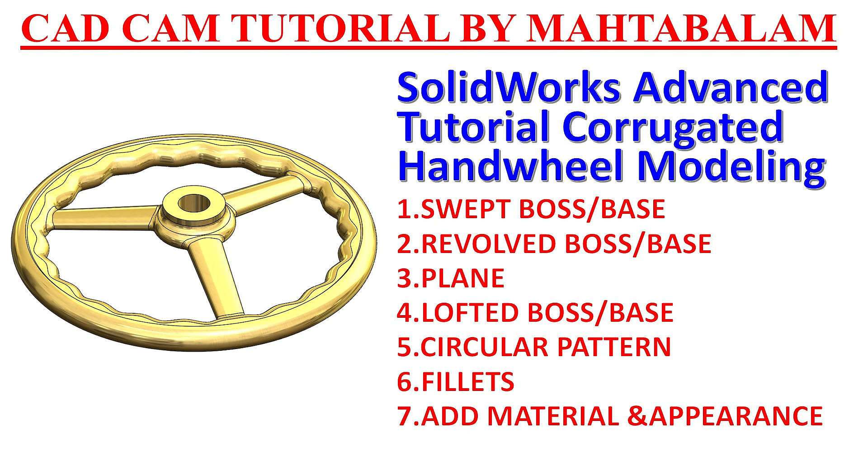Let's take a new exercise in SolidWorks: corrugated hand wheel. This is a kind of metal wheel, a car wheel, and you will see all dimensions are in millimeter. It is casted, and material is cast alloy steel. Let's start. First we will create the outer body, then the center one.

Now you will see the outer body from outside. It is circular, but from inside it is zigzag curvy. See, this structure we are going to create with the help of spline. These radii given are 22, but we are going to use spline to find this out.

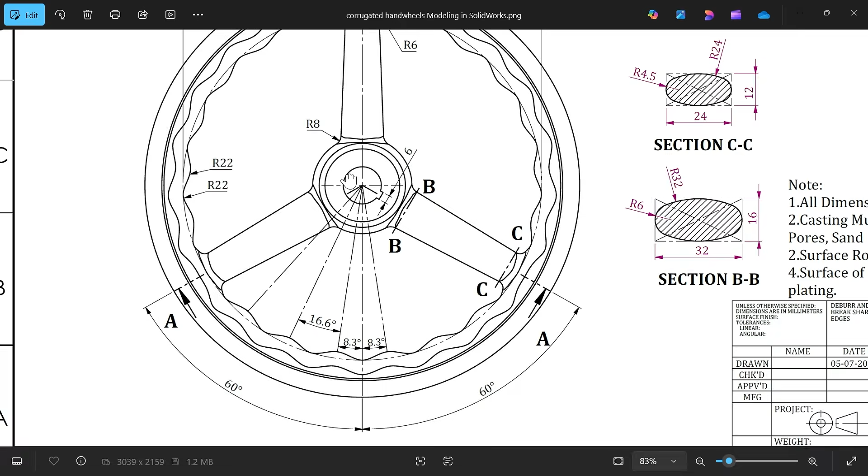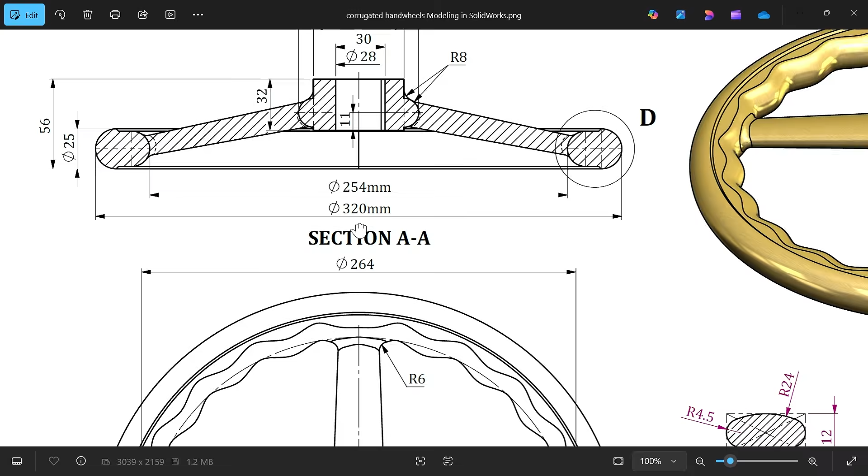Let's find out how we can do this. This outer diameter is 320. Then you will see there is a detail, section AA, from here to here. This is section AA. This section has, from inside to inside, 254, and you will see crest and depth. This depth diameter here is 264.

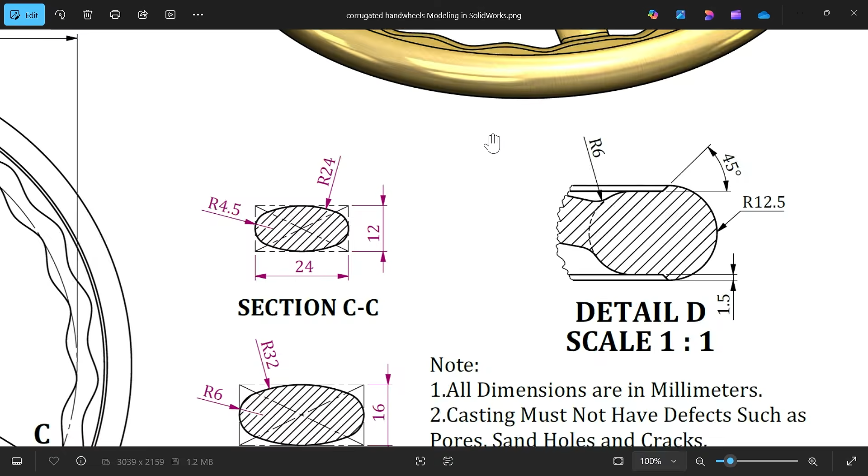So this is the diameter for this curve. Then the shape you will see is 12.5, 45, 1.5. You will see here the radius we will apply at the end. How will we fix this one? We have to fix this structure between this outer line and this inner line and outer line. The angle between these two is 8.3, total 16.6. There are 4 crests, so let's see how we can do this. Angle 60 degrees.

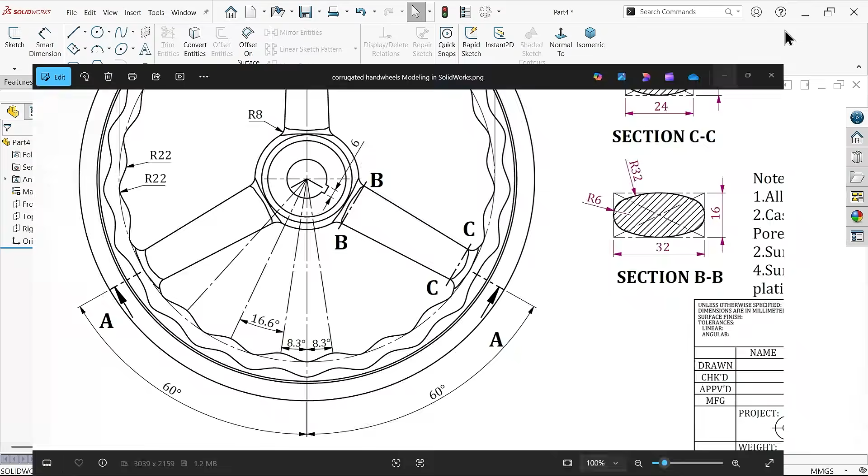Top plane sketch, activate circle, and let me draw 2 circles. Make sure for construction. Now activate smart dimension: 264 millimeter outside, 254 millimeter inside.

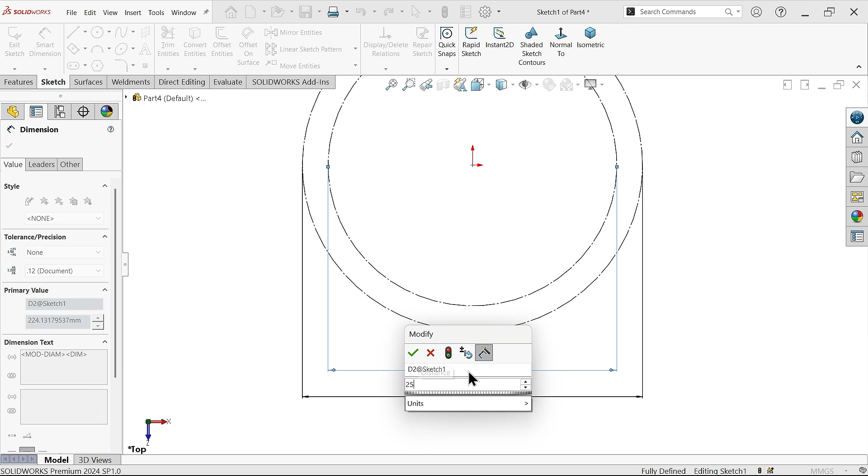Activate line and start from outer circle to here and come back. Again activate the same line as center line. Let me draw. Smart dimension: 60. Now the angle between these two.

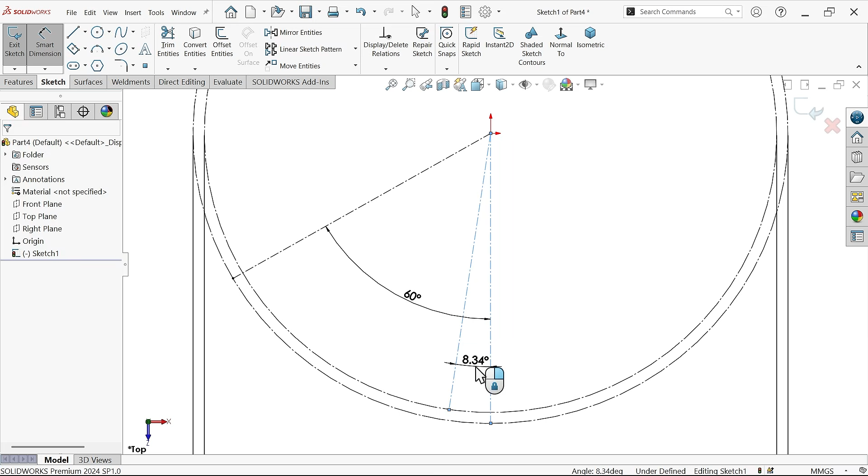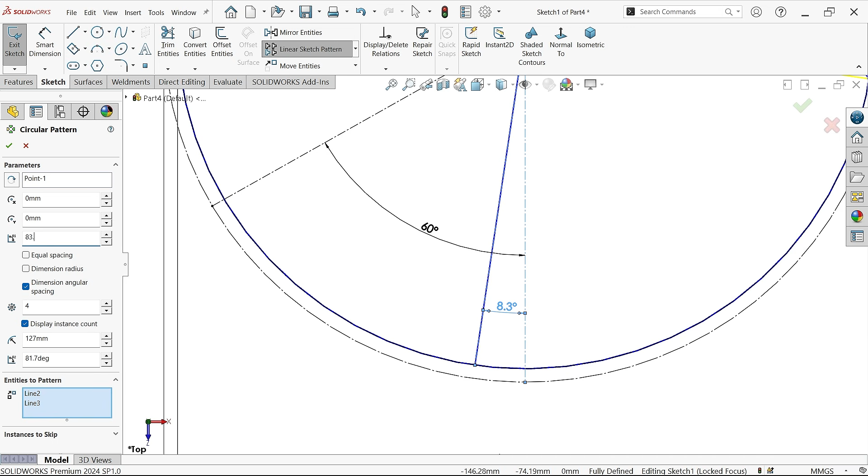8.3 degrees. Now let's try to use circular sketch pattern. Choose center here, and here choose dimension angular spacing. We need 4 number, and here let me select these 2 lines, and apply the angle 8.3, total 16.6. You will see 4 number of instances.

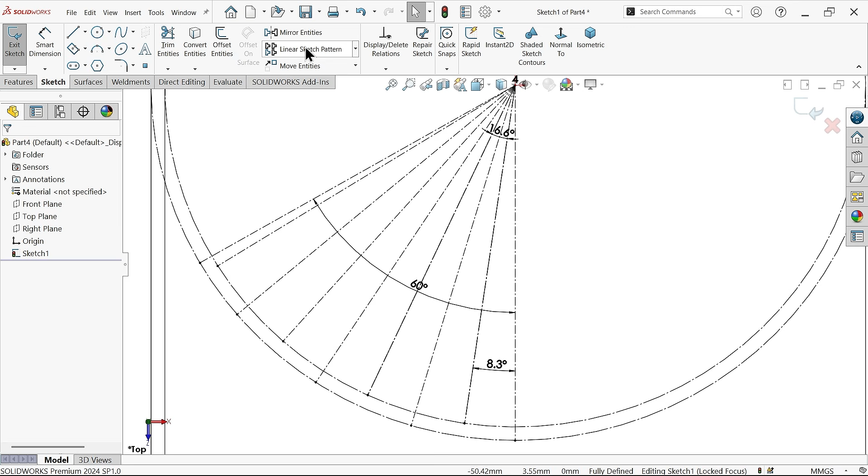Now similarly we have to mirror. This all we need to mirror, because we need these points. Mirror about this vertical line.

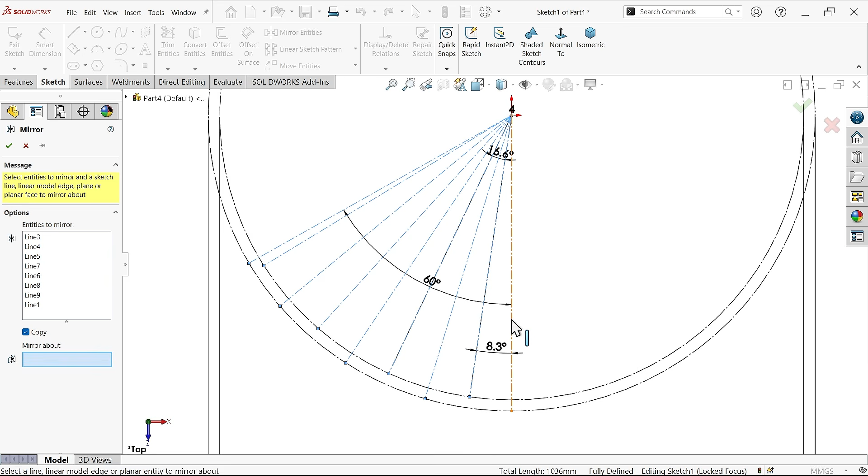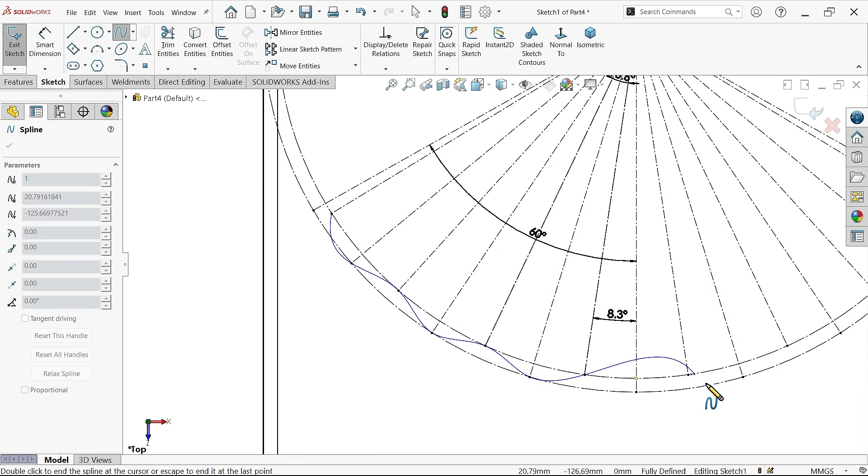Now let me select spline here. See, now spline going to start from this end. Connect. Now one by one connect all these points alternatively. It will take time, we will create only one side, later we will make the pattern.

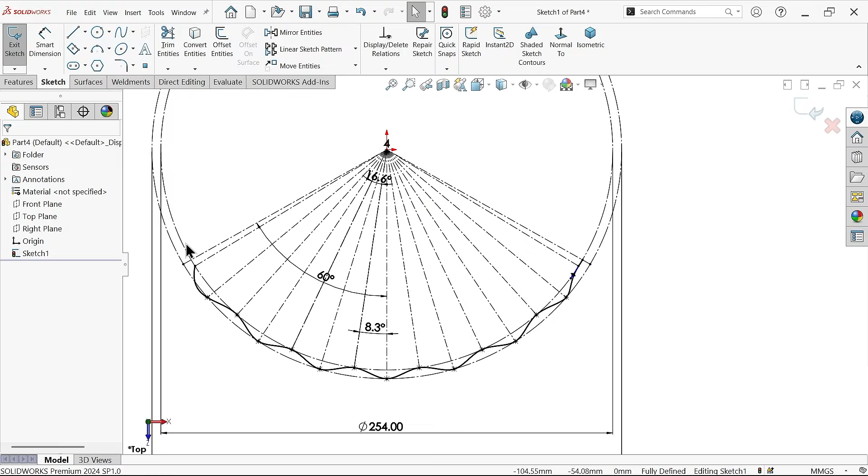Right click, select. Now here 3-point arc, connect. Now select this, select this angle and this one as tangent. This is important. Here let's do this 3-point arc, connect this small portion to here. Now see, this is fully defined. Select this spline, drag this handle, select this handle, hold shift key, select this arc, tangent relation.

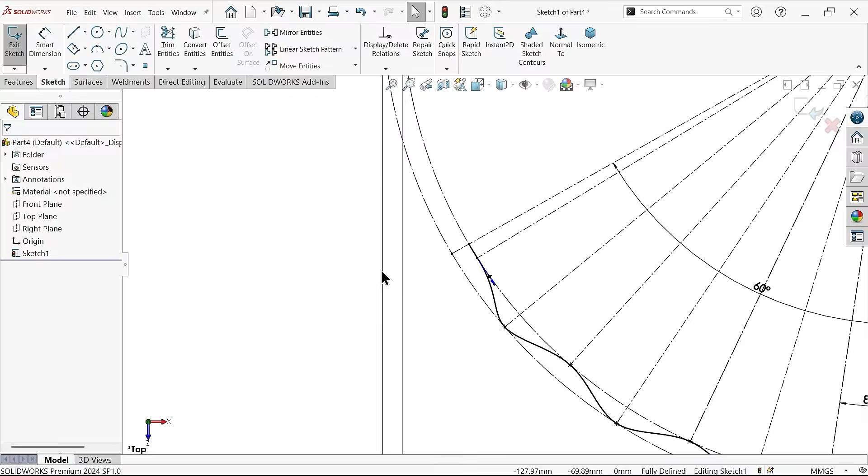Now we don't need to define this angle. If you measure this, the radius is going to be near 22. Circular pattern. Here I am going to select this center, 3 number... equal spacing 360 degrees.

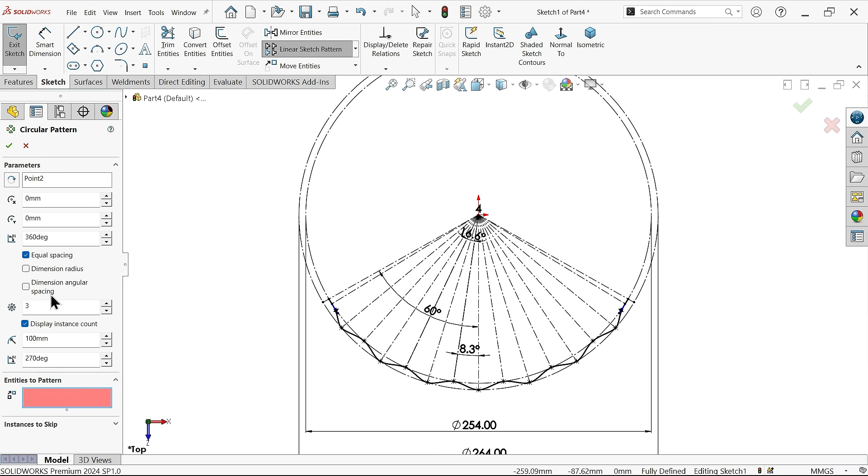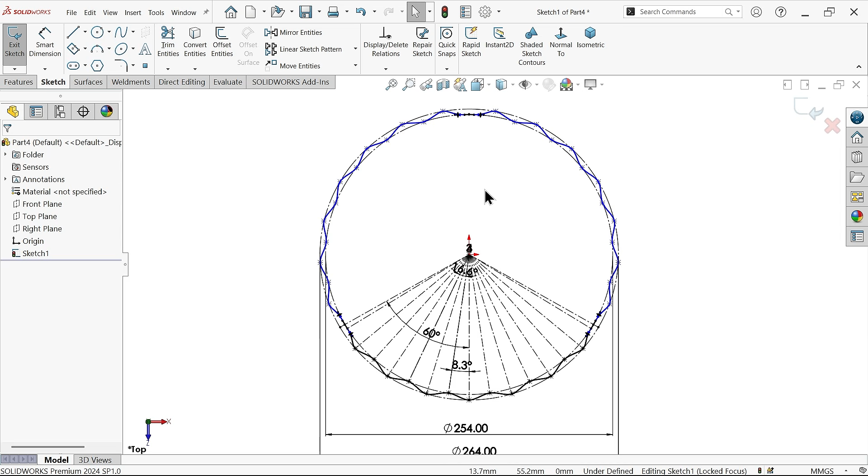Now here let me select this pattern, and even let me select this one also, so that we will get... okay. Now we are not going to use this one. This is perfect. Let me exit and create one more sketch.

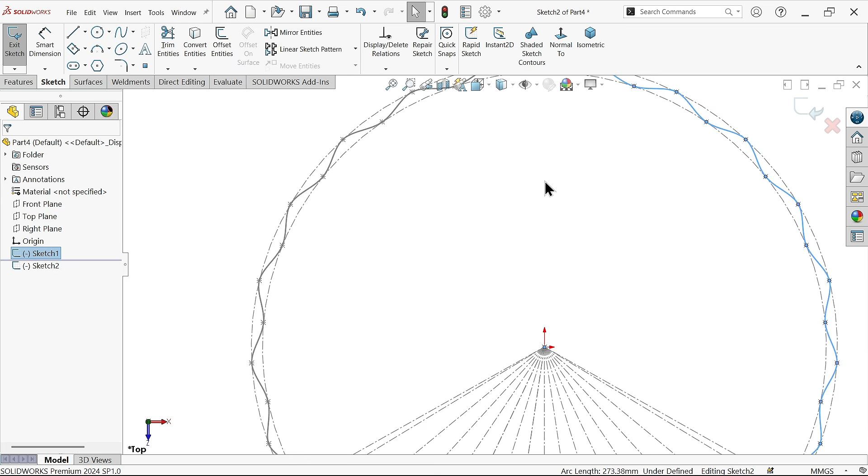So again I am going to choose top plane, sketch. Now here select chain. Convert entity. Again select this one and let me select convert entity. Hide.

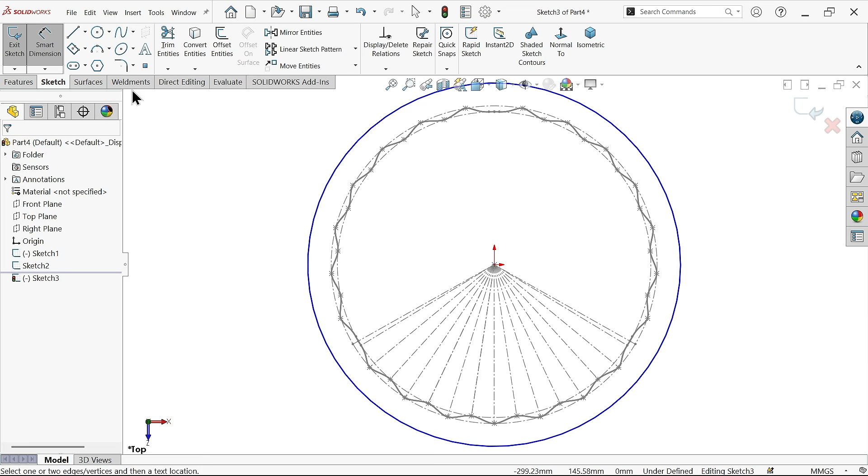Here connected only, here balance. So first sketch, show, select this, convert entity. Exit. Now this is the structure I am going to use. Again go to top plane, sketch, circle, draw a circle and make diameter 320 millimeter.

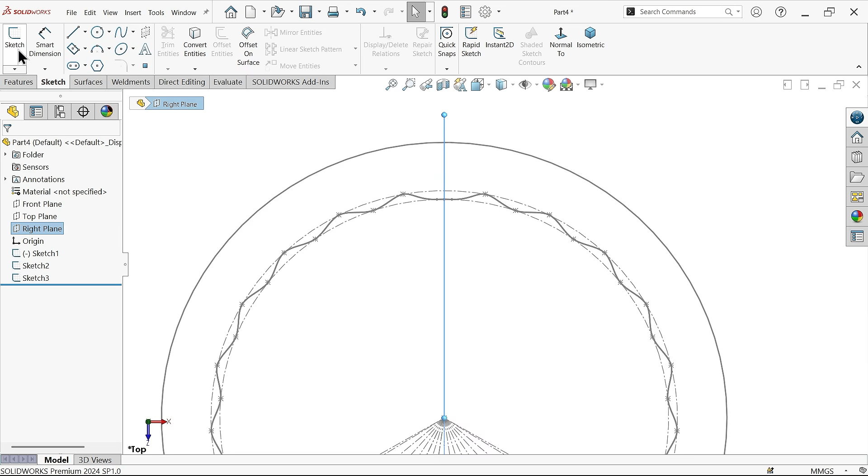Exit. Now we need to create those planes. So let me select, choose right plane, because right plane here is going to mesh, coincide properly. So sketch, ellipse. Let me choose slot, straight slot. Press escape key to get out.

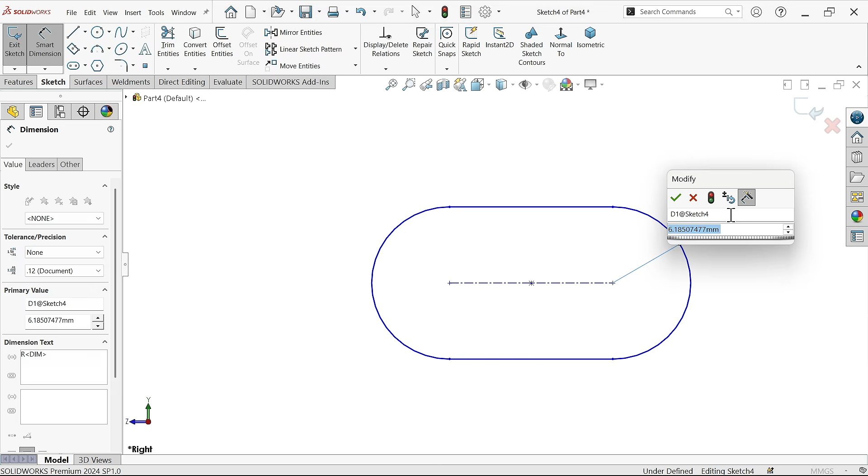Now here choose offset. Oh, before that, let's go to choose smart dimension, radius 12.5. Now again offset 1.5, reverse. Now delete this one.

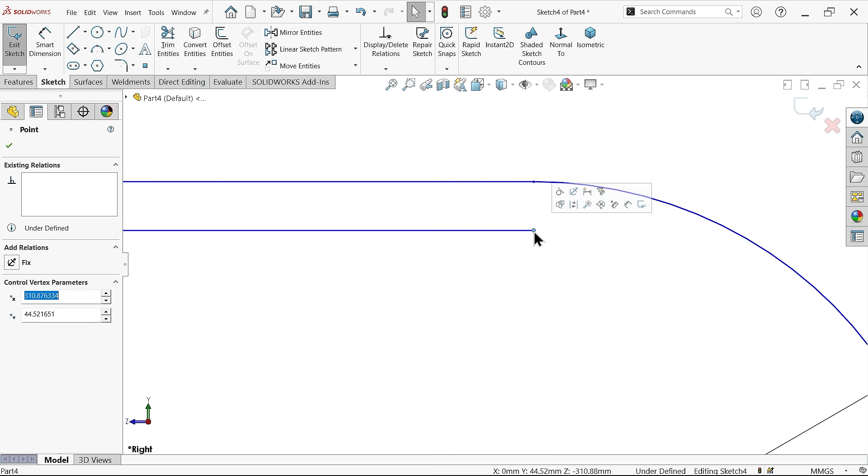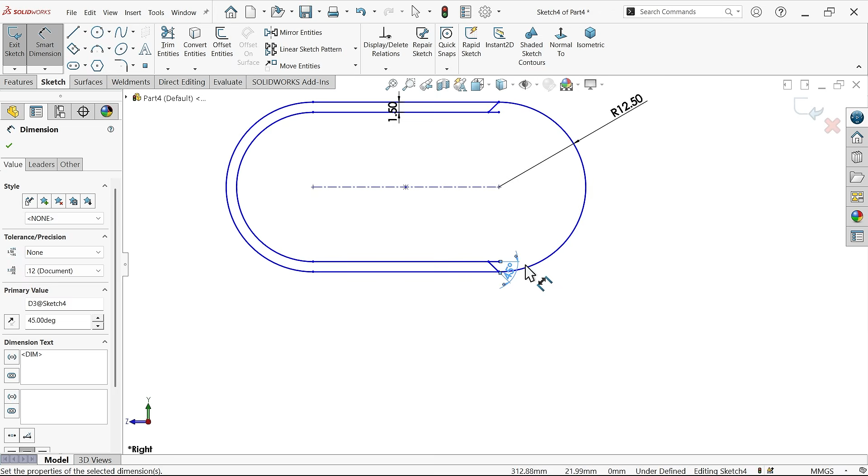Line. Now from here to here, similarly connect here also, from this point to here, smart dimension, 45 degrees. Trim entity, trim this one, trim this. We need this shape.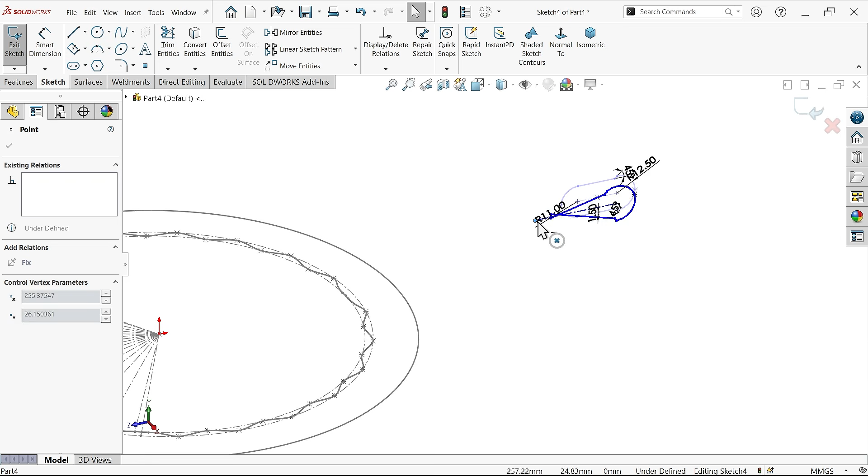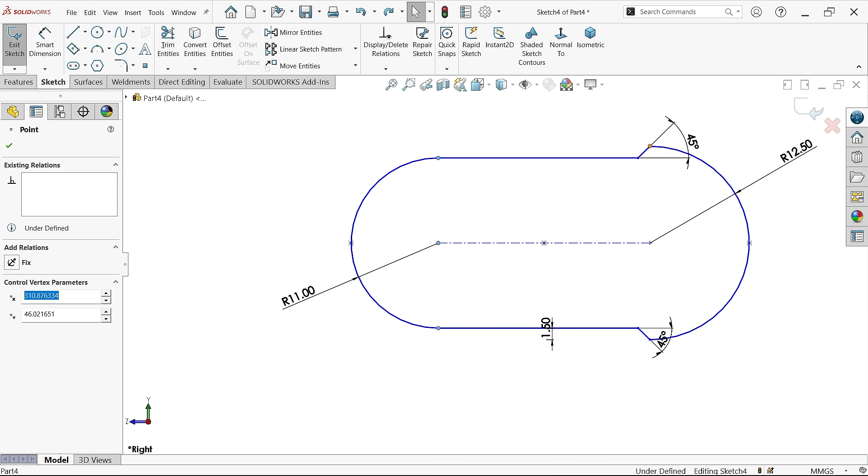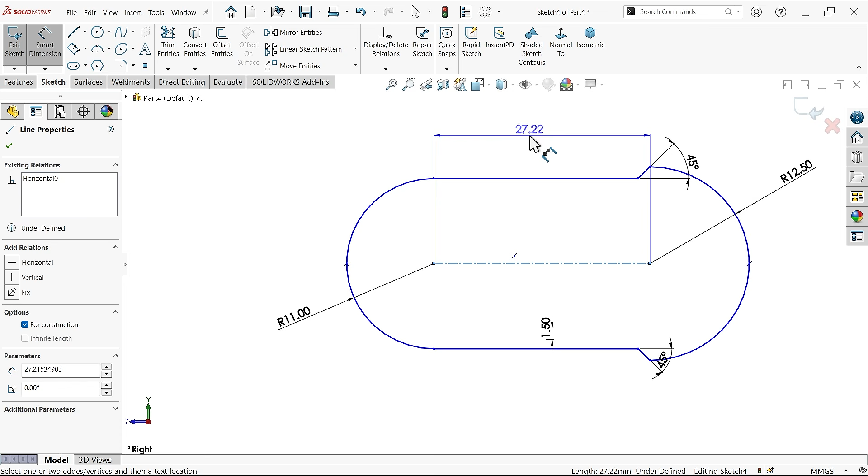Okay, again these. Let's create a few important relations. Undo, that's fine. Now select this point, this point, this point, vertical. This is important. Now here, this point, top point, hold shift key, this point, this point. This is important, vertical relation. Now let's try to move. For the time being, I am going to apply a dimension of 20. For movement, we have to delete this one. Now this is perfectly moving.

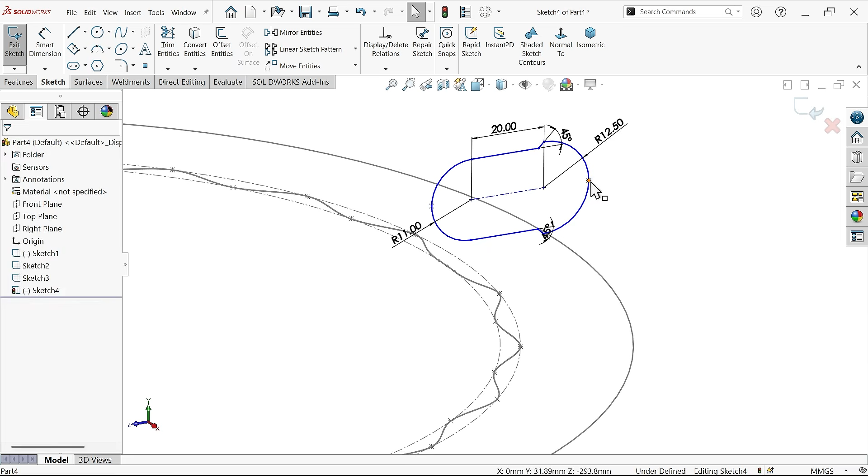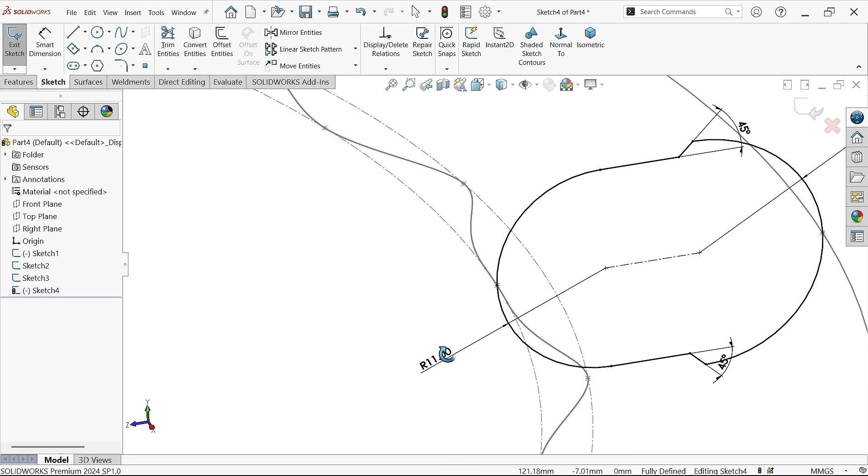Now select this point, hold shift key, select this outer curve, make pierce. Delete this. Now select this point, select this curve, pierce. See, this is an important relation, you must achieve this one.

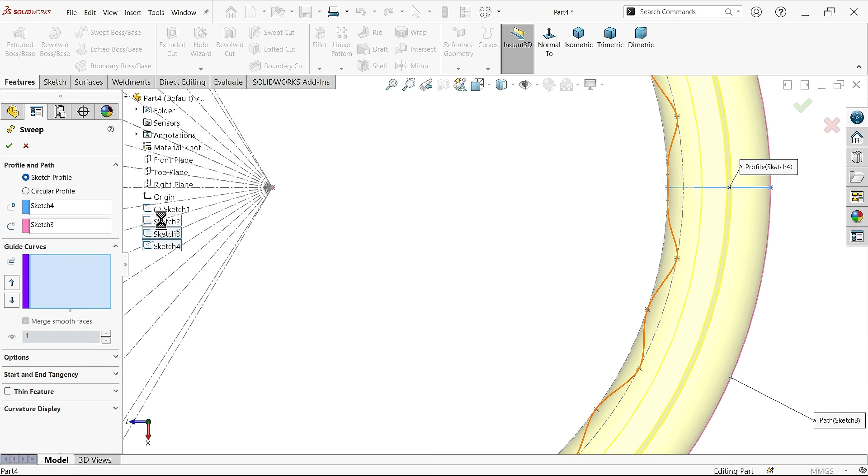Finish. Go to feature and use swept boss base. Here, see profile selected, sketch profile. Now path I am going to select outside. If you see from top, this is circular. Look, but go to guide curve and choose this curve, or drop down. See, it took the shape.

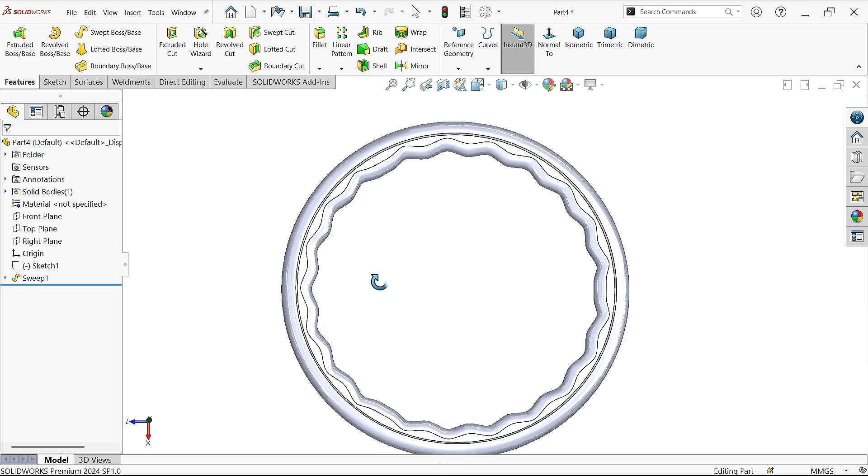Merge smooth faces. Okay. Now let's hide first sketch. Now you will see, see, we achieved. Section view, normal. Okay, now see, this is what we need to achieve.

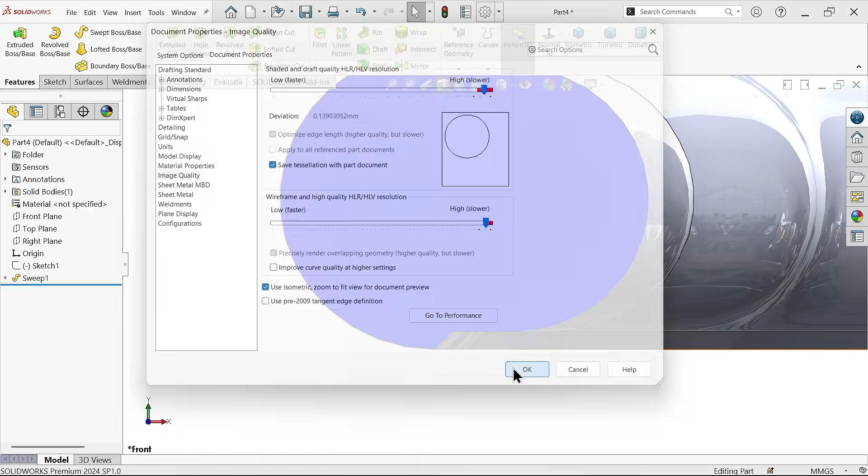I am going to keep quality higher. Okay, the edges become sharp.

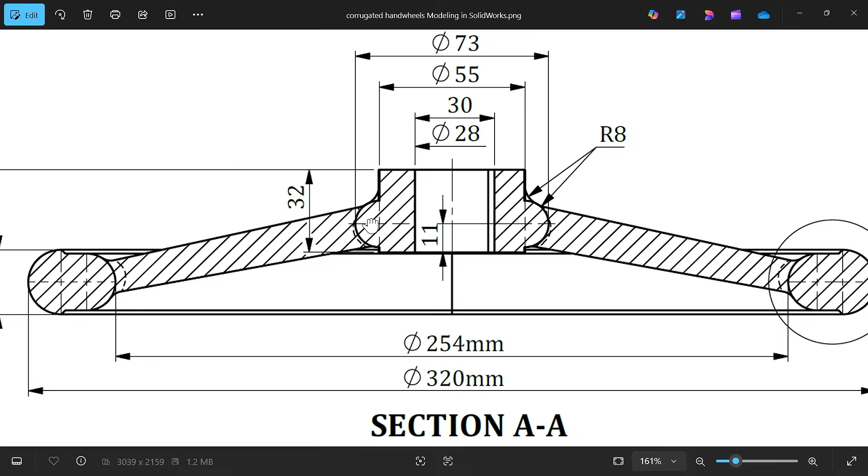Now let's make the center part, you will see in section view. See, this is a kind of shape, 32 total, 56 from bottom. Now there is one curve 11 millimeter and inside diameter 28. Then there is one more diameter 55 and this circle outside to outside 73 millimeter. 11, 30. Okay, that's finish.

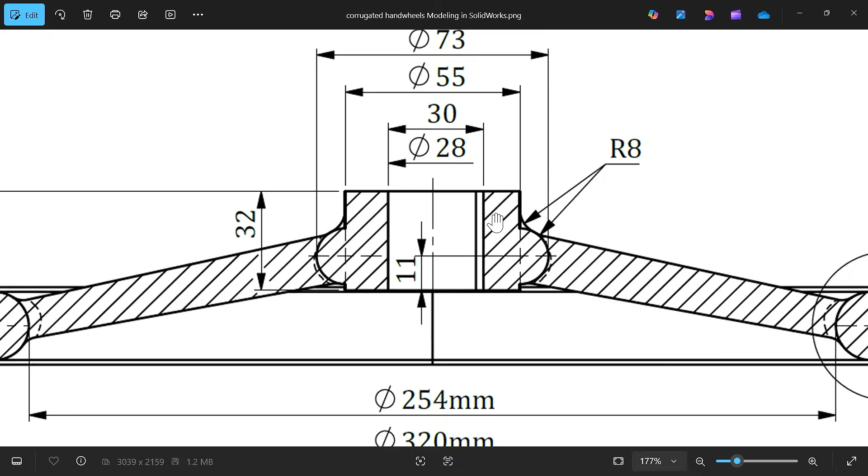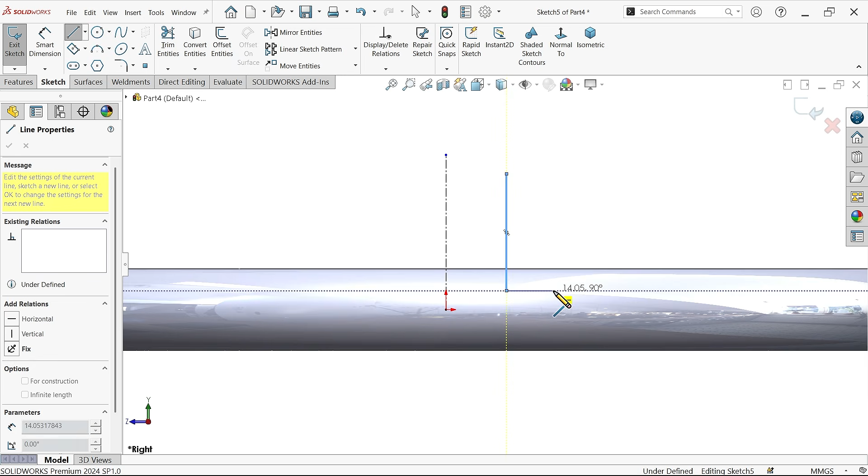Right plane sketch. Now let me select center line. Go back to the point and see the point is converted into arc. Press escape key to exit.

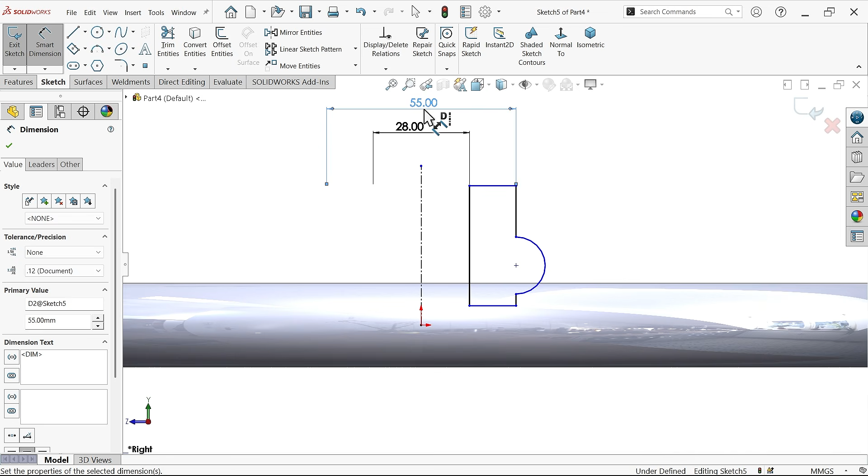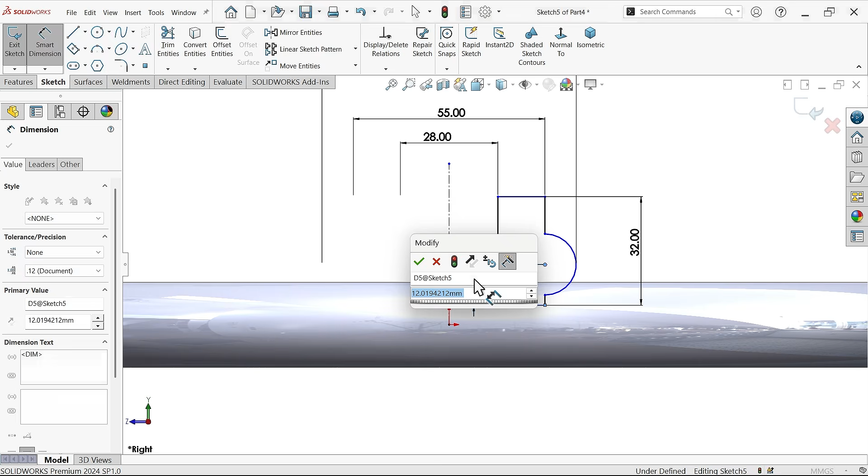Smart dimension. Inside diameter 28, 55. Hold shift key and select this one. Outside to outside 73. Okay, 32. From here to here 11. Okay, what else balance? Distance from here to bottom of this face, 56. See, it seems fully defined sketch.

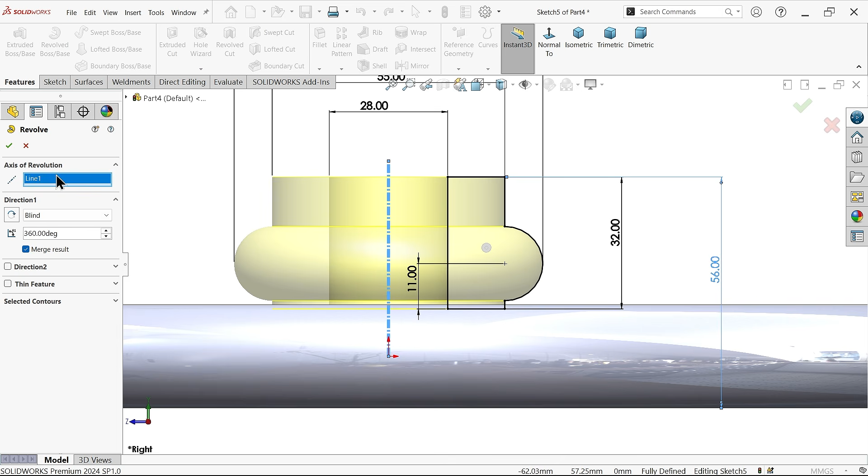Go to feature, I want to add a circular body in a circular way, so you have to apply revolve boss base. Now see, by default system took this line as its axis of revolution. Merge result, angle apply 360 degree. Okay, and here we have a complete 360 body.

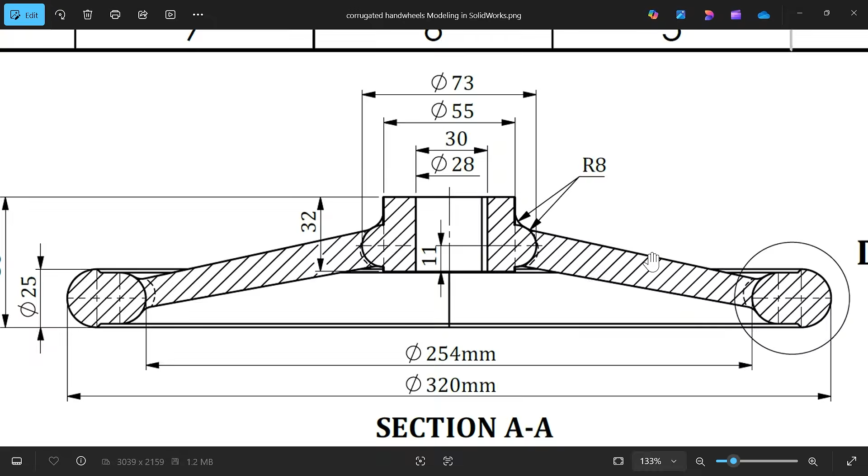Now let me select sketch, show, and select this sketch, show. Now let's make this handle, you will see this handle. This handle going to connect from this circle to this circle, and there is a different section C or B. B 32 16, this curve 32 6.

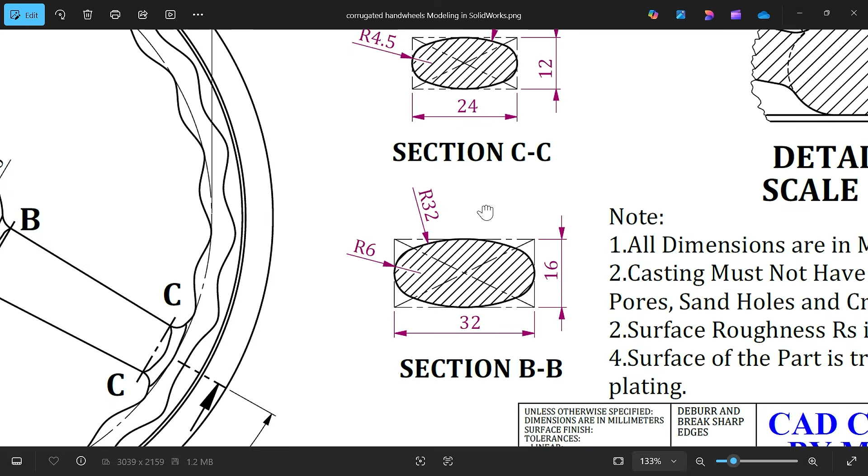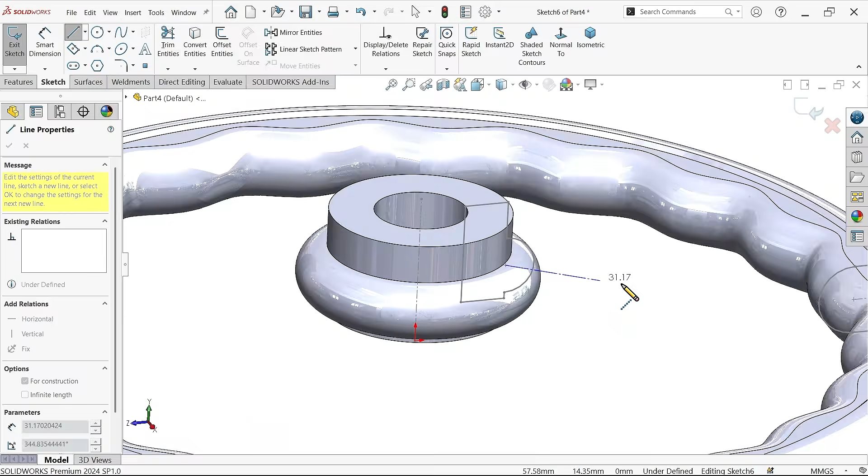24 12, 24 4.5. We have to create first plane, then we have to apply this. Let's see how we can do this. Right plane, sketch, activate center line, and see, select the center point to center point of this.

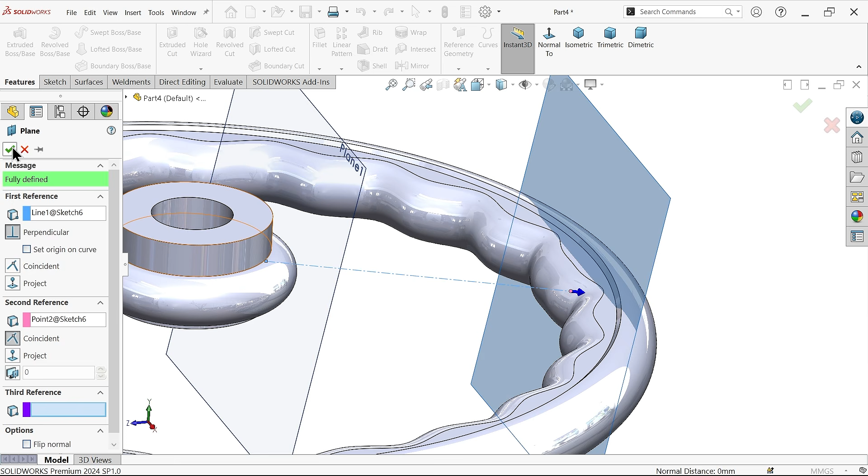See, this is fully defined sketch. Exit. Now let me hide this previous sketch. Plane. Select line, select this point. Now this plane perpendicular to this line. Say OK. Again I am going to choose plane. Now first reference this line, then second reference I am going to select this another end point. See, this plane perpendicular to this line.

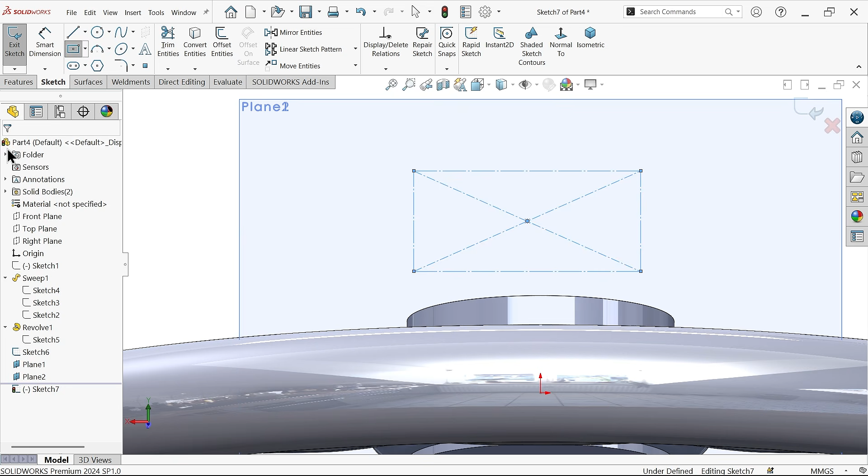Say OK. At both the planes we have to create those cross sections. First plane, sketch. OK. Center rectangle. Make this one for construction. OK. Now I am going to use 3-point arc.

Actually, before that first we have to apply the dimension to outside. Okay, anyway, let's see. 32, 16. Okay.

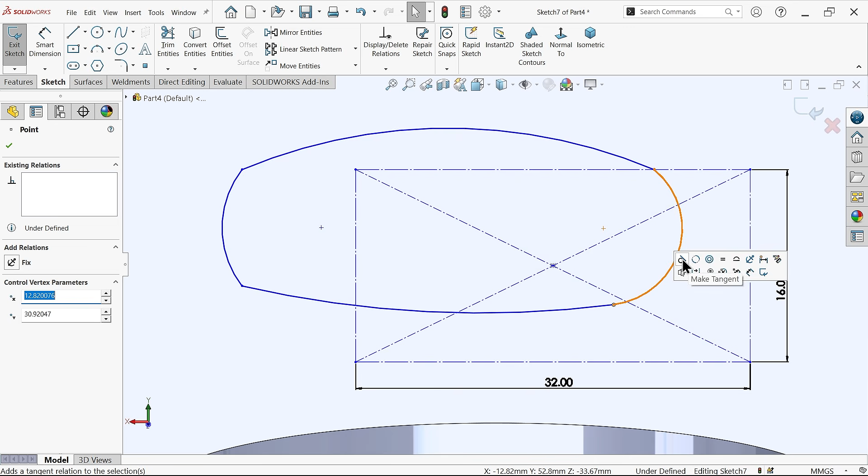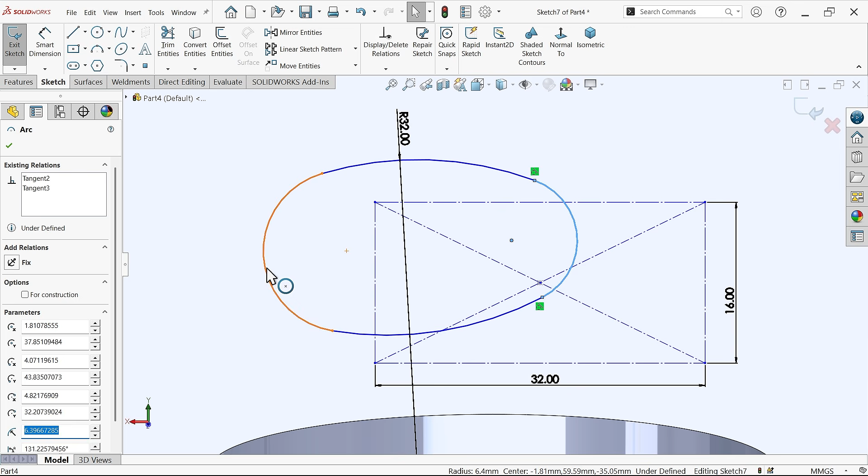Now select this point, tangent, tangent. Make all points tangent. Okay, one more relation. Select these two, equal. Now these two, equal.

Radius 6. Okay, now we have to fix. How we can fix this one? Select this one and this one, tangent. Similarly, all walls should go tangent with them. Okay, one more important relation, make it horizontal. Okay, we don't need this angle.

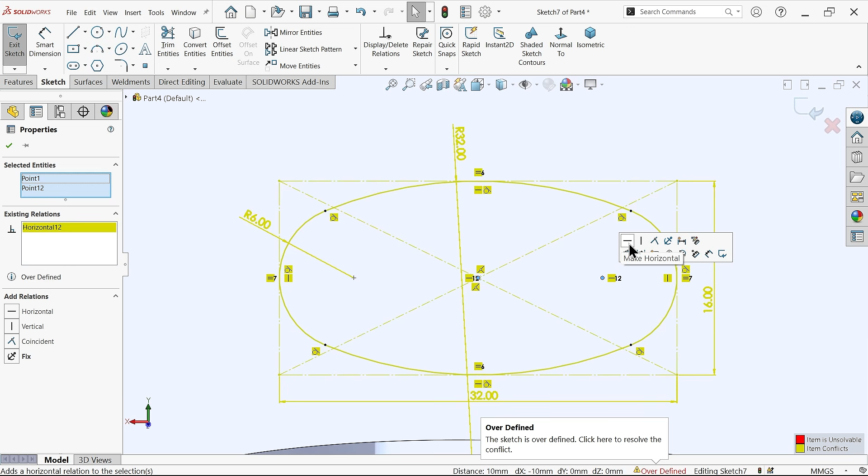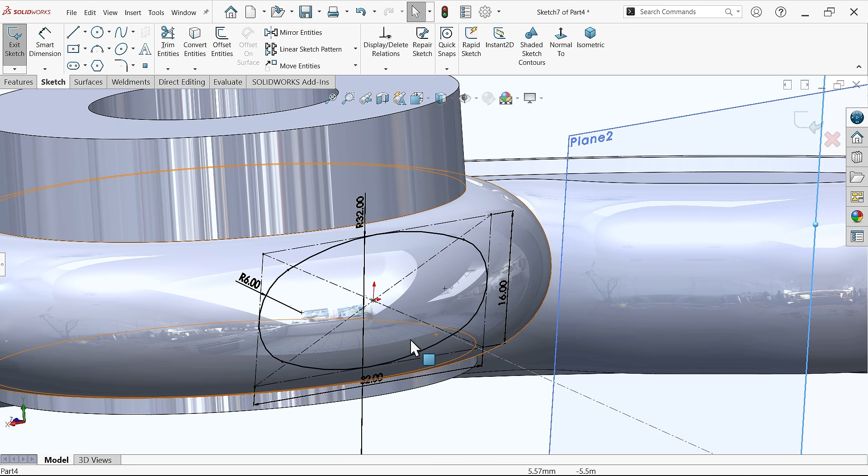Okay, fine, this is going to move. Select this point. Coincide. Look, it seems fully defined sketch. Exit. Plane 2, sketch, same method I am going to repeat.

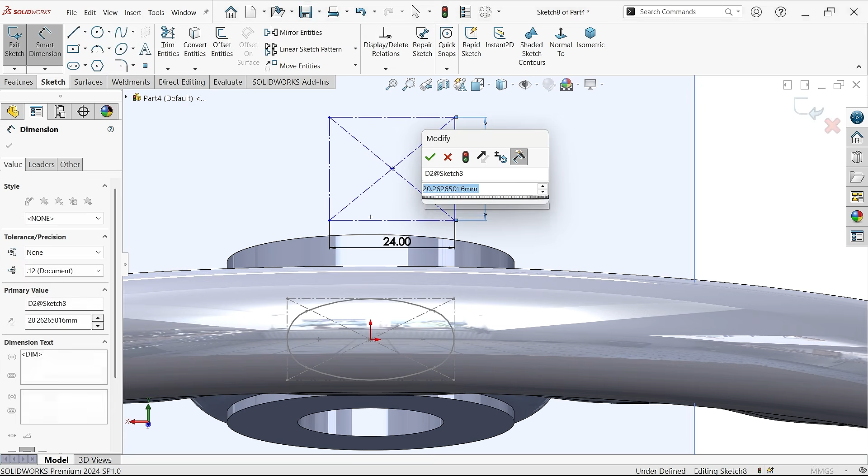For construction, smart dimension, 24, 12. Again, create ellipse with the help of a point. Connect, create this curve with the help of 3-point arc. Now select all the end points, tangent. If you click end point, you will see this popup, so simply choose tangent.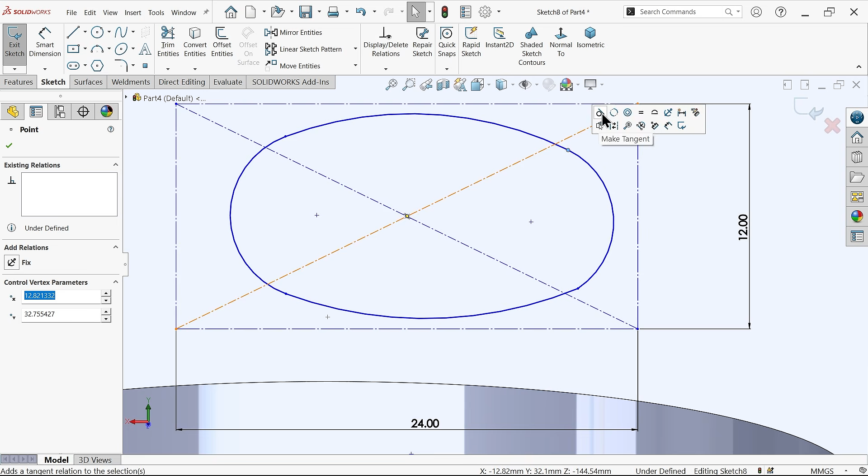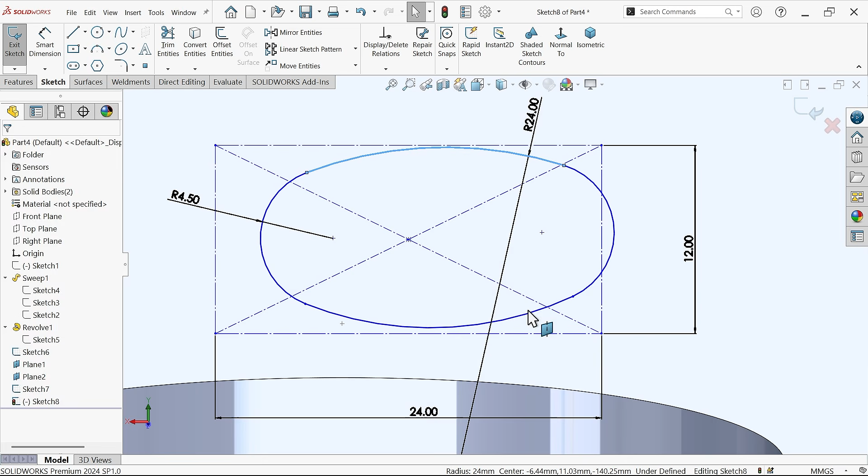Smart dimension, 24, 4.5. Okay, let's create these two equal. Equal. Okay, it's already equal. Now let me select this one.

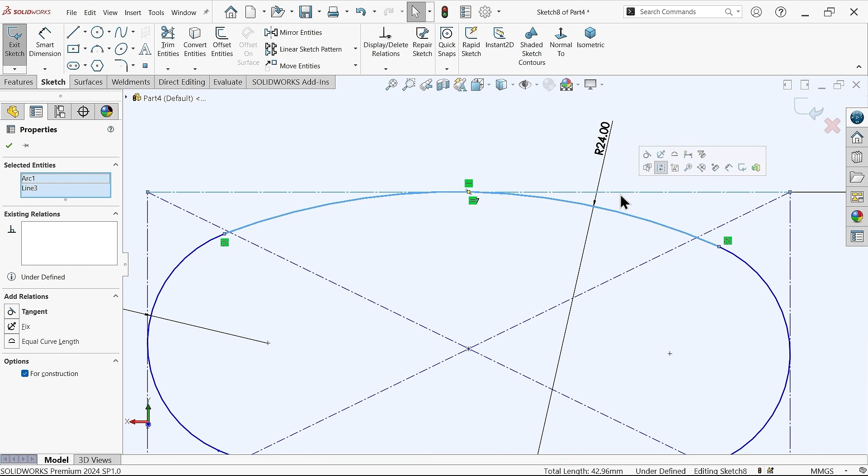Make all the arc tangent relation. Okay, now this one, just rotate. Select this point and select the end point, hold shift key and make coincident. Look, these points are fully defined.

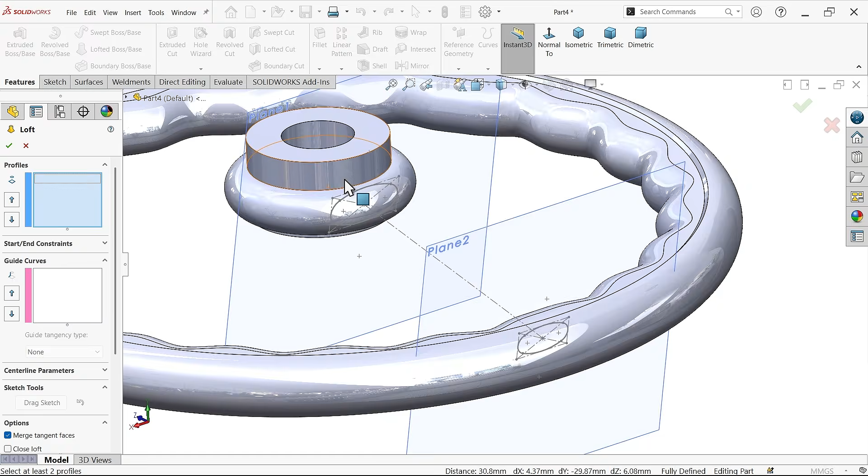Exit. Now go to lofted boss base. Clear, first I am going to select this, so I am going to select any one point, let's say this point. Profile 1, profile 2. You will see the preview. There is no need to make any guide curves because this is straight. Merge tangent faces, show preview, merge result. Okay, say okay.

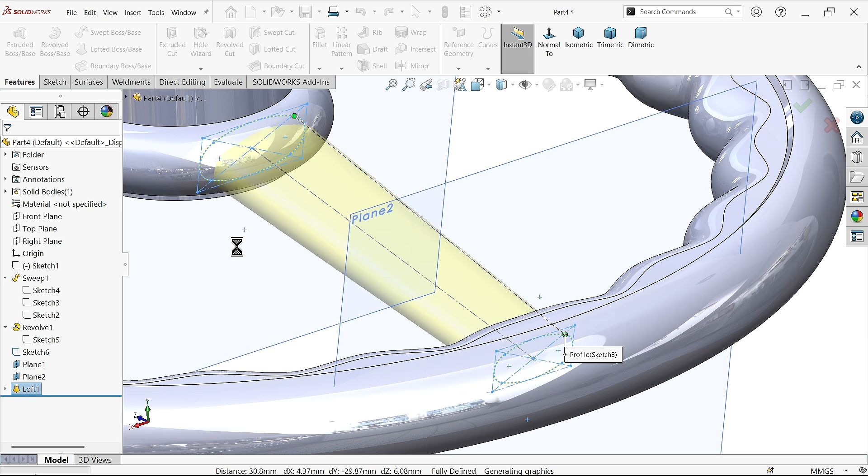Now select both the planes. Hide. Select this line. Hide.

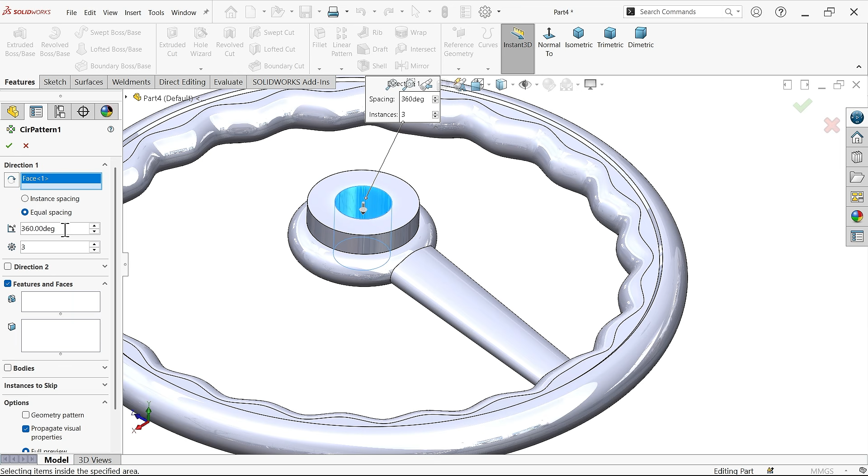Circular pattern. For direction, I am going to choose this circular face. Equal spacing 360 angle because we need 3 number of patterns. And here feature, so I am going to select this. You will see the preview. Geometry pattern. Say okay.

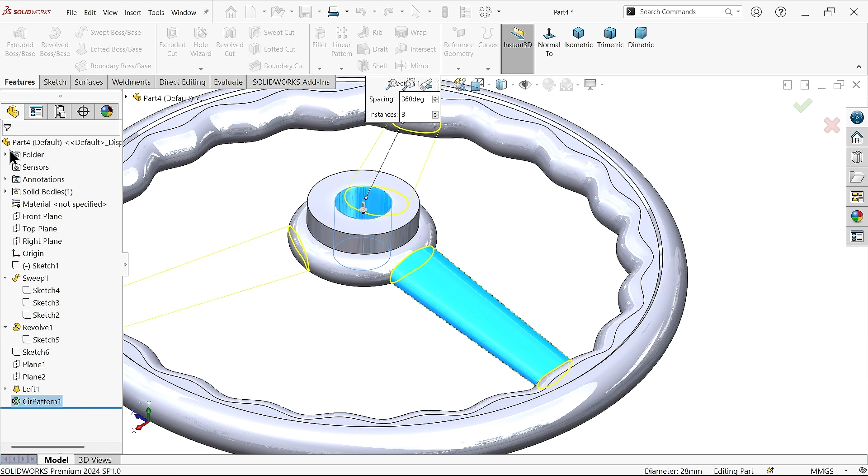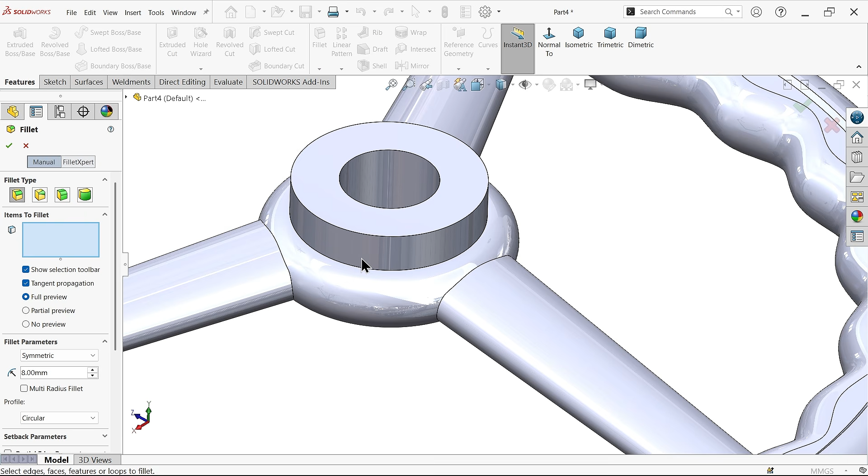Now radius R8, R6, R8. Fillet 8 millimeter symmetric and here choose fillet type constant size. Okay, now here profile also you can change, keep circular. Now first 8 millimeter, so 1, 2, 3, 4. Say okay.

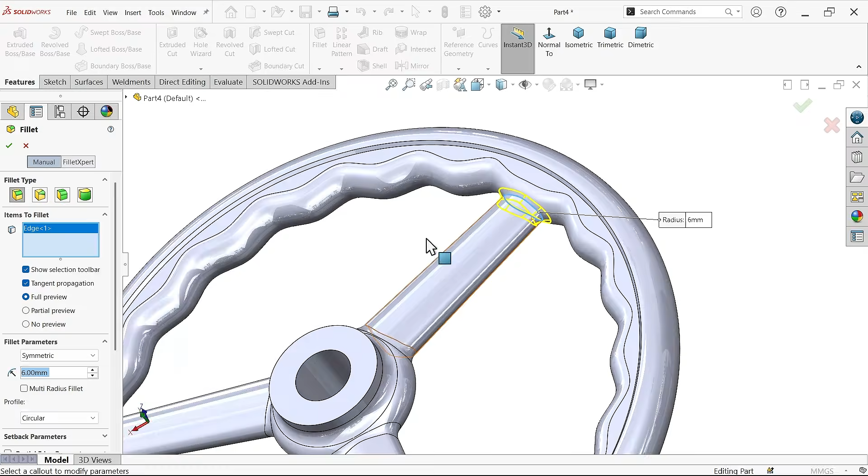Profile again fillet. Now this time keep radius 6 millimeter constant type and select these edges, end edges. Okay.

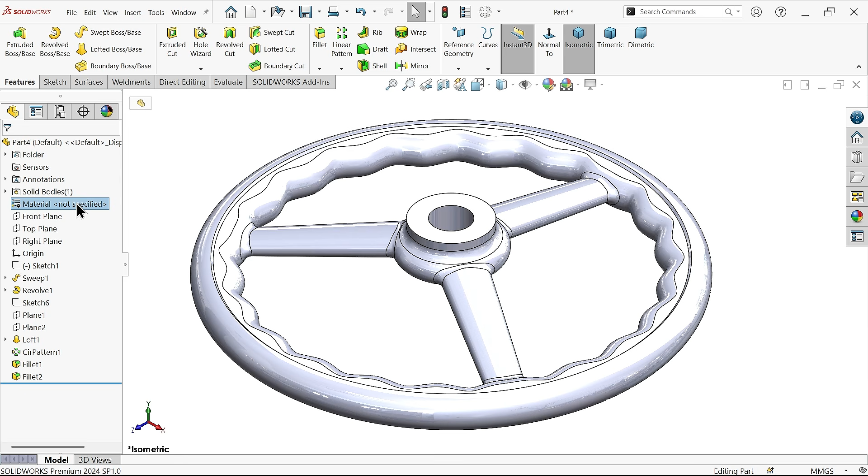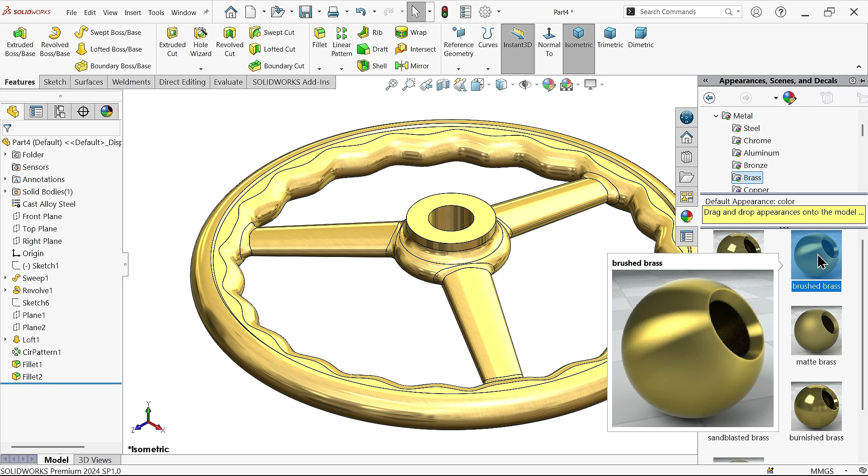Now I am going to apply some plating. If you want to add material, edit material, it's going to be cast alloy steel, 73 density, apply, close. But I don't want this preview, so simply use apply brushed brass.